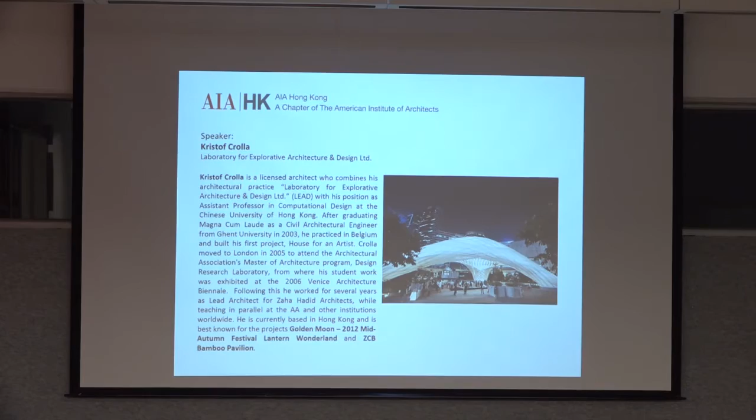But tonight I'm very happy to have three speakers who are not only friends and colleagues, but really individuals and architects who are pushing the boundaries of technology and material. And we're lucky to have all three of them here practicing and teaching in Hong Kong. The first is Kristof Crolla. Kristof is a professor at the Chinese University of Hong Kong, as well as the founding partner and principal architect of LEAD, the Laboratory for Explorative Architecture and Design.

Kristof is going to talk to us tonight about his work with bamboo and the pavilion that was recently completed outside of the Zero Carbon building for the Construction Industry Council. So he'll be talking about digital techniques of modeling, measuring, analysis, and fabrication of a very traditional material that we're all, I think, well aware of and its importance to Hong Kong construction.

Olivier Ottevaere, who's a colleague at the University of Hong Kong and the principal of a design studio called Double O Studio, has turned his small office in the corner of the 4th floor of the Knowles building at Hong Kong U into a fabrication laboratory and has been funding and sometimes self-funding the most amazing concrete fabrication processes using manual and digital modes of design, innovating in terms of casting and form making. So we look forward to hearing about a bunch of his work.

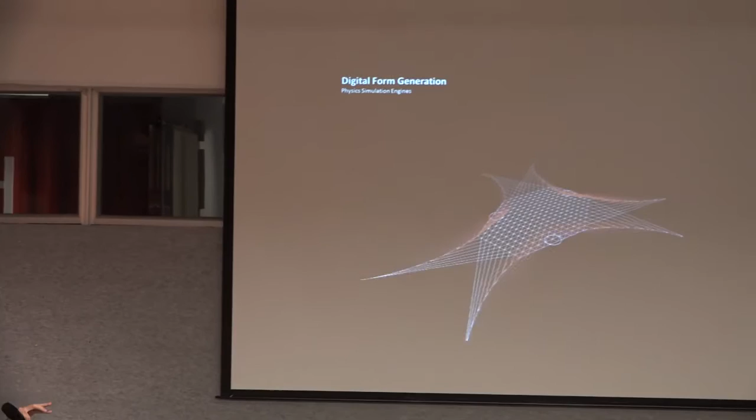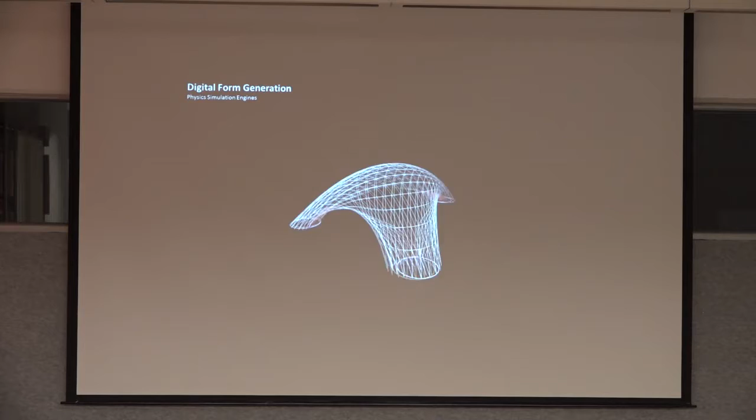This system was then taken on by my team and turned into the first digital model, where we started off from the site, placed 3 circles, which would be the foundation points, made a diagrid that was based on that, then extended that diagrid out, which we discovered after a few iterations how to do, and then used these real-time physics simulation engines to bend that whole system down onto itself and fold this flat geometry into a triangulated cupola structure that had 3 cylindrical column legs coming down to make it into a very stiff and stable hyperstatic structure that had triangulated areas, quad areas, and even just free hanging areas as you see there.

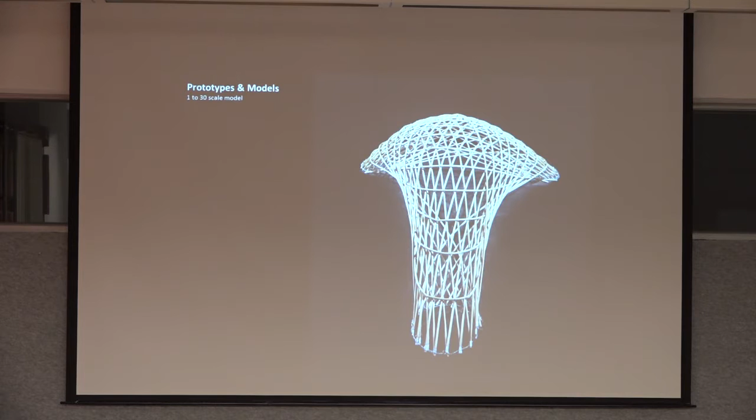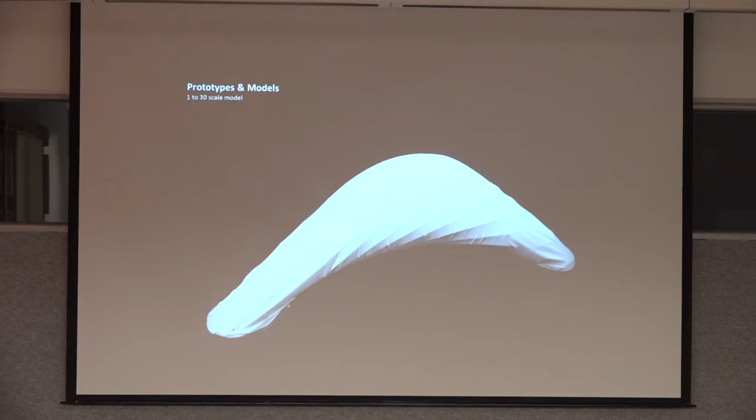To move forward, we first made a prototype at 1:30 scale, which is this one, which pointed out a few difficulties in terms of trying to weave the bamboo, which is not possible. The poles are so stiff that in their entire length they can easily be bent, but in a small scale you can't. So we had to change the installation sequence of these, which I'll show you in the second digital model. So after some testing, we figured out the most appropriate way to position all these poles one by one onto the scaffolding without ever needing to weave them too much through one another, but to really still create this very elegant structure.

Then we made a 1:4 prototype on the rooftop of our school. Here we purposefully used rattan, which is also a grass-like plant, but this is solid, it's much more flexible. And we made this model to test where it would fail structurally, and to test if the installation sequence would work. So it is very strong, you see me sitting on it here, but here at the bottom areas we found some weaknesses that needed to be taken care of later. But the system was a proof of concept, so we went ahead with the construction soon after that.

We made a new digital model that integrated all of this. So here you see the final design. It's a 350 square meter covered area. 200 people can sit inside it. The largest span is 37 meters, which is quite sizable, and at its highest point, it's over 4 stories high. Here you see what the skin would do at night to become a translucent lantern.

We made a few more prototypes on 1:20 scale to fully test all the lengths and all the overlaps of all the tubes. And then once we had that, we went ahead for full construction.

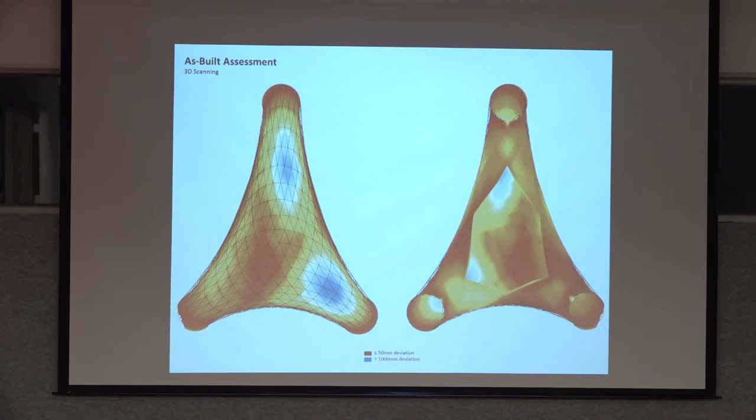We did do a 3D scan of the pavilion to see how close we were to the digital model. Not that it mattered, because it was meant to be something that would find its own shape. But interestingly, we found 2 areas with a very large deflection of over a meter. The reason is that 2 of the 3 members were almost straight, and they straightened themselves entirely out without the 3rd one having enough force to keep the curvature in there. But the whole system was still synclastic in its curvature, so we're not really worried that anything bad's going to happen. It's still there in perfect shape.

For the drone photography.

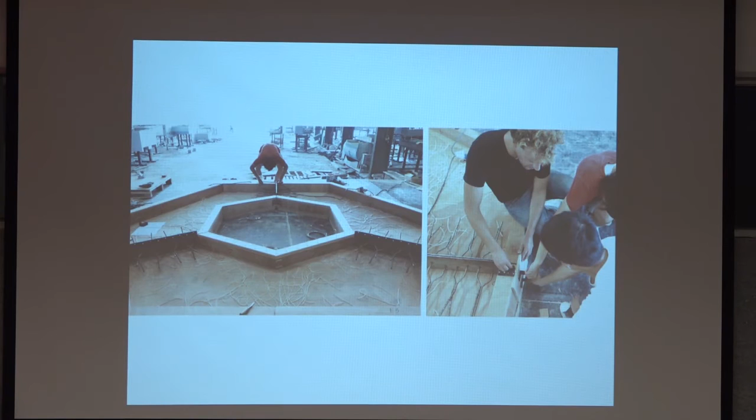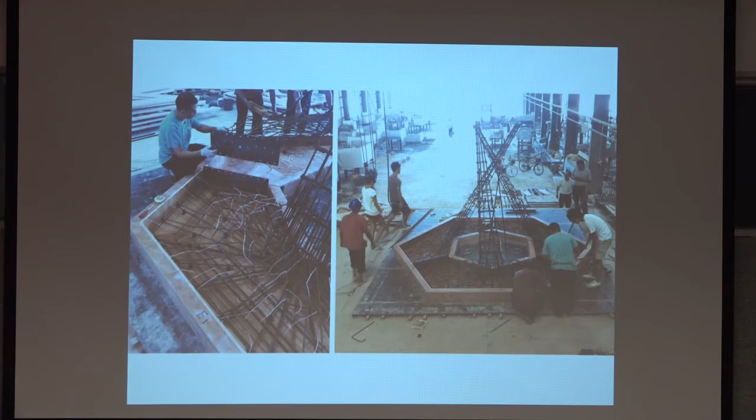Starting with the slab, all those cables are basically trying to hold pressure once it's cast. The reinforcement cages built on site. So with students, we basically participated in the whole construction with all the different kinds of building trades during this fabrication process. The stretching of the lathe on the temporary framework, the casting process, and the curing. And up to this point, we didn't know actually if it was going to work. 2 rotations of basically 7 tons of concrete, placed back in its intended position, and ready to be shipped.

So that's an image of a 40-story typology. And it proposes a series of catalog variants from one primitive, from which future residents are able to basically decide on the extent of their living. And this ultimately makes up the overall identity of the building.

So it's basically trying to rethink those steel molds that are daily being assembled and disassembled. You have all these kinds of interchangeable plugs that can vary and basically produce a variable output based on the size of openings, location of openings, length of balconies, and those make those catalogs. So we developed fully, with all the construction details, the first 9 small prototypes, and now we are seeking funding for a 3-story mock-up in the yard.

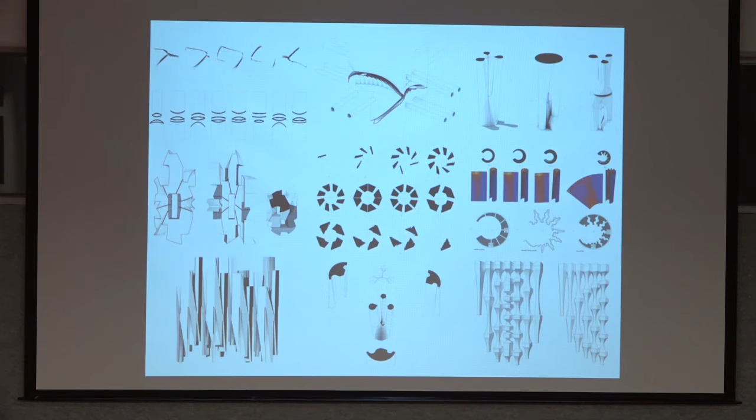There's also a lot of environmental study, trying to respond to a subtropical climate. And further down the line, drawings that are becoming a little bit more speculative, on how they can be organized as housing, all the way down to the living units, and what other type of spatial organization they create.

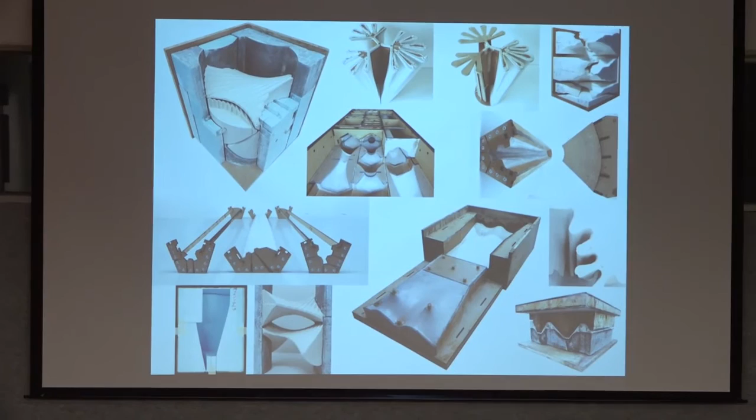This is where I place a lot of the effort and the focus. It's in the conception of the mold, and I have very little to do with concrete. Actually, I use quite a high grade of materials. Different materials are coming together. One recurring theme that I can speak a bit about is where you see those 2D profiles, something I like to liken to stereotomy, Philibert de l'Orme's invention of using projective geometry to guide the stone cutter in the carving of a block.

So this is what I extract from the digital, very simple information, 2D profiles that are placed together into a carcass, into a framework, from which I interpolate with fabric the remaining 3D geometry, maybe material computation. Once that's stretched, it gets hardened with epoxy and becomes a fiberglass mold, bypassing more cumbersome processes like plaster or CNC molds. So you see some examples of those molds as mock-ups, as tests, and as final molds.

So let me say just a few words about each column. Column 1 draws from Candela's shell saddle surfaces, timber formwork, and uses a stack of hypars. The idea is to transpose a lot of that language, which is mainly single story, horizontal, into an idea of vertical living. The question was how to perforate the shaft of a column while maintaining structural integrity, using the stacking of hypars as a way of demarcating a public ground at 1 to 100.

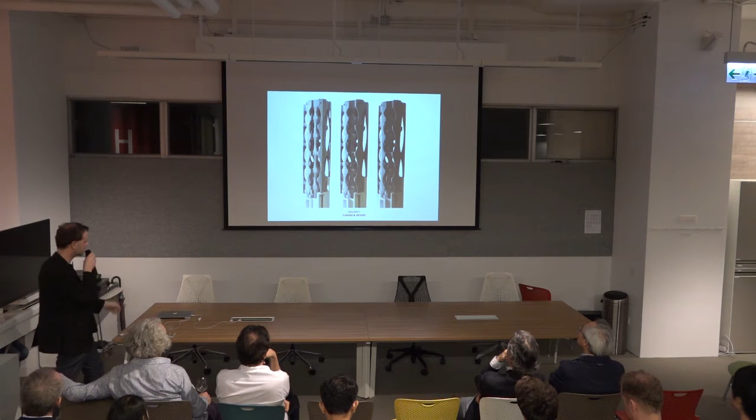Column 8 is drawing from Nervi's changing profile columns, also towards the top, creating very deep shaded spaces. They're about 1.8 meters each. And column 9, which I just finished a few days ago, with this idea again of terracing within a point block typology, both downward stairs and upward stairs.

An idea of rendition within an urban context, trying to contrast again the kind of skeleton framework that basically populates the city, and also trying to think of them as a way of reframing a city.

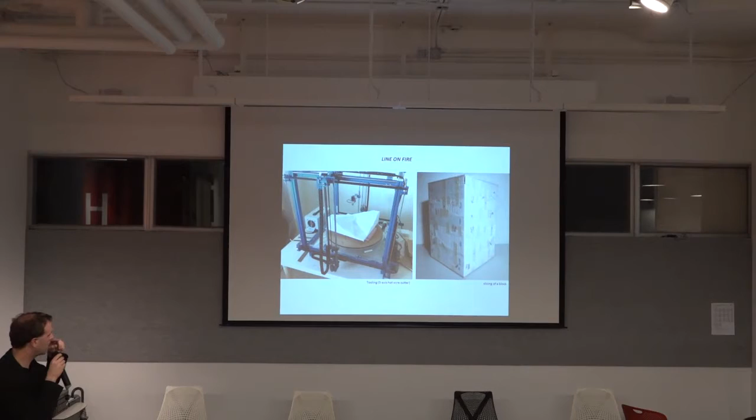The last section is something I've been embarking on recently. It's a fascination with the straight line. It's called line on fire. The idea of a line moving in space to describe some of this geometry. We'll get back to this tool, but it's a mold making machine that we constructed in school with a former student named Victor Long. It's basically a 5-axis hot wire cutter machine, 4 translation, 1 rotation.

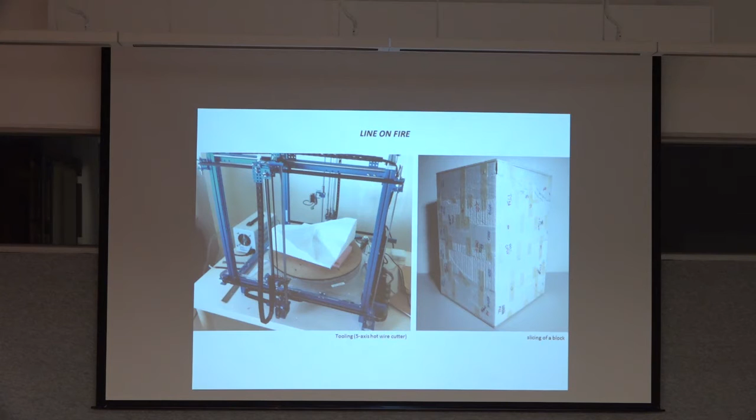We got a lot of parts from shops in Shenzhen. And it's again thinking of stereotomy, the idea of the slicing of a block, but this time internally. As this block gets sliced, the parts get pushed apart and cast in between.

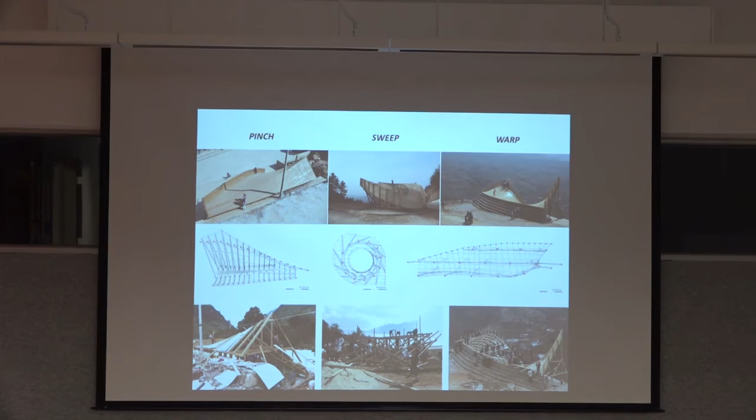But this originated from this series of projects you may have seen, which I've done with a colleague of mine at HKU. They're all rule-based geometry, defined by a moving line in space: the pinch, sweep, and warp, a series of 3 timber structures, very low budget. They all have very specific site responses and small programs, in Yunnan province, in villages after the post-earthquake reconstruction efforts. But I wanted to speak a little bit more constructively and geometrically.

So the moving line is trying to be arrested by a sequence of evolving trusses. In the case of the pinch, it starts with a small door and evolves towards a pitched roof, underneath which we've located a library. The sweep is organized both radially and tangentially, brings people progressively up and down, and the warp is organized longitudinally. We use the same carpenters for each project, 1 wood section only, 11 cm by 3.3 cm thick.

So it's the idea of trying to articulate those new grounds as roofs, active grounds, with straight timber elements. The whole concept is that through that surface, the space is activated above as a new ground, and the space below is also activated through the articulation of the ceiling. The literal ground is just a flat slab, but the compression and expansion of the space is through the changing trusses.

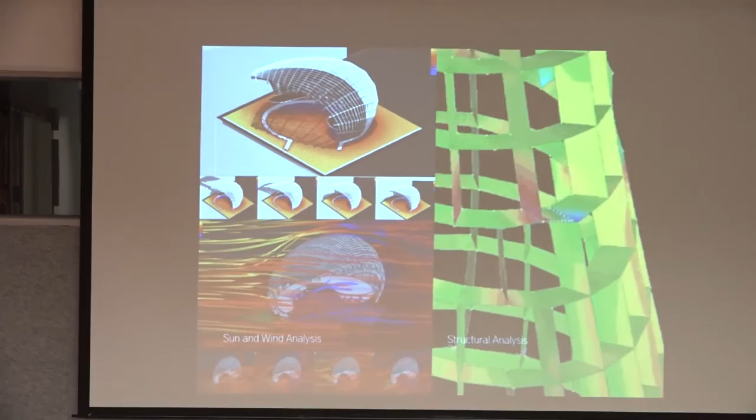So it's not integrated in each one of the projects, but we try to get to that later, where we can test an early sketch at an early stage for its strengths and weaknesses, and act on the design at a very early stage, not doing the reverse process, designing everything, getting Arup or somebody else in, and say, make it happen. And they put a big column in the atrium. I don't want the column in the atrium. Too late, guys. So we believe in talking about how things are built and how they stand at an early stage. It's important.

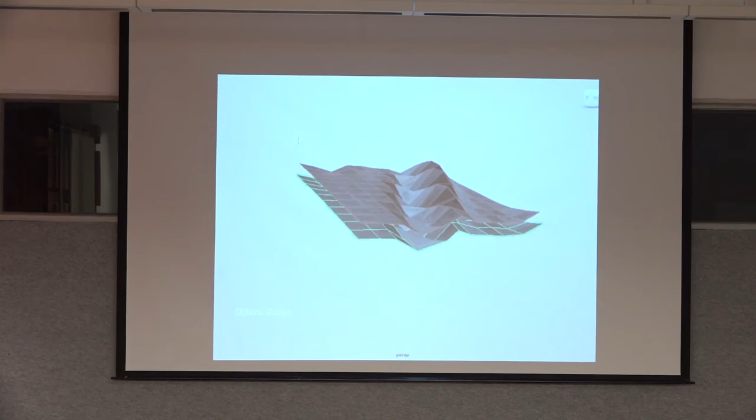Some of you know about parametric design. This is something that Roberto did, I would say, 12 years ago. So for some of you, it's very old. Maybe for some others, it's new. What it's showing is that Roberto is changing a skin structure. And almost in real time, you can extract the information for each change. So that's something that's happening today in the industry.

I mean, I was talking with Martin, he just produced, I don't remember how many thousands of drawings or actually cutting files for a project in Macau. But that's where people start. It's how to extract information for the construction of something, a building, an object, in real time, and even give it different materiality and all that. This is today quite a simple thing to do, as I've been told. I'm not able to do it myself. But you can extract, each panel can have a different shape and all.